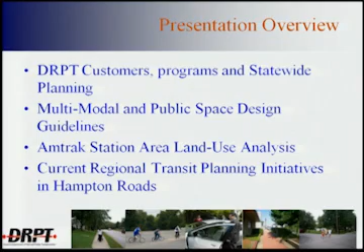We know we can't continue to expand the roads. We know we can't continue to build out, and it's just cost prohibitive. In some urban areas, there just isn't the right-of-way available for that expansion to occur. So how can we utilize the existing rights-of-way more efficiently and move people, while keeping in mind the level of service necessary for the automobile? How can we make all of these things fit and work together?

That's something we're going to explore at DRPT a little further, but I do have some good examples that I'll present tonight to show you our thinking and get some feedback from you all.

And then we'll talk a bit, and we're just about a week ahead of being able to present the full regional transit vision plan for Hampton Roads. We'll be presenting that information to the Hampton Roads Transportation Planning Organization on Wednesday, then we'll take it to the HRT board or commission on Thursday. Then we'll have two public meetings coming up: on November 30th we'll be on the Peninsula at the City Civic Center at Oyster Point Conference Room, and on December 1st we'll be on the south side at the HRT facility in Norfolk, on Monticello Avenue. At that point, we'll present all the recommendations for the Hampton Roads Regional Transit Vision Plan, the various evaluation criteria we used, the results of that study, and what we're recommending in terms of phasing for those recommendations.

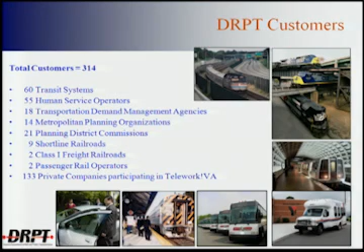It is amazing the amount of interest we've had for teleworking, with the private sector coming to us saying, how can we make this work? This is just the private companies we're working with, so you can imagine all the employees benefiting from our Telework Virginia program. It's not just the 133, but 138 public agencies we have right now, and their employees. I like to keep that in mind, because it doesn't look like a very impressive number, but it really is when you step back and think about it, because those are actual trips not being taken in the peak periods. There may be shorter trips happening during the day, but certainly those peak period commuter trips are removed when employees are teleworking.

We have numerous grant programs, both on the state side and the federal side. We have our state transit and capital operating assistance that we provide to our transit operators. We have demonstration projects that right now we're trying to focus on ITS, Intelligent Transportation Systems, doing real-time messaging to customers—when is the next bus arriving, that sort of thing. We provide technical assistance to our transit operators, helping them with their studies, and if they have an issue, we provide that technical assistance to help them through it as it arises.

We have our TDM commuter assistance programs, our senior transportation program, our telework program, and then our rail preservation, rail industrial access, and rail enhancement programs. Those are all state-funded programs.

On the federal side, we work closely with the metropolitan planning organizations on statewide rail and transit planning using federal funding. We have small urban area programs, rural transit, transportation for elderly persons and persons with disabilities, the job access reverse commute program, the New Freedom Program, the American Recovery and Reinvestment Act, and our passenger rail capital and planning funds.

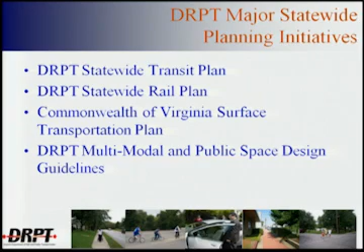I've already talked a little about the multimodal and public space design guidelines, and how important that will be to help guide localities in understanding how to utilize existing right-of-way in a way that accommodates most, if not all, uses. Not every street or corridor is going to be a multimodal corridor—we have to bear that in mind—but where it makes sense to designate one, we should provide guidance in that direction.

So now, as I mentioned, our statewide public transportation plan is really predicated on population growth. What is the trend in terms of where we're growing, and what will the needs be out in 2035?

We did this planning process in conjunction with VTrans 2035, the state's transportation plan. It's more of a policy document, mandated to be approved by the Commonwealth Transportation Board every five years. It was most recently approved last December, and we're now putting together an implementation plan for VTrans 2035.

From the transit and public transportation perspective, we needed to understand and contribute to VTrans 2035 in a way that identifies where the greatest need will be, but also where there will be big demand in terms of carpool, vanpool, and demand response services.

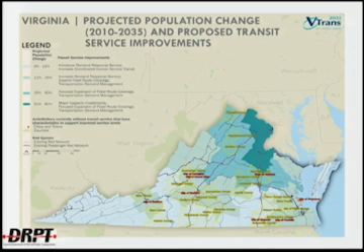We do have 4 new services coming online in some smaller areas where the business community came and said we need to provide public transportation to our employees, for job access and employment access. So we're starting some new services just for the purpose of economic development, and I think that's where the trend will continue in coming years, especially in smaller areas trying to compete and bring in businesses.

Now, the 3 main priorities here, I won't spend a lot of time on these, but in general we need to support Virginia's existing transit service through existing operating assistance. We also need to achieve and maintain Virginia's transit assets in a state of good repair.

We know that currently we have a backlog in the state of good repair for our transit systems in the Commonwealth, and we need to address it. Once we address the backlog, we need the ability to maintain the transit fleet and assets in that state of good repair.

And then, of course, expand the transit capacity statewide, as we just discussed and as this map indicates. We really need to be cognizant and focus the investment strategically in areas that are going to see significant population growth, but also be sensitive to areas with specific and unique needs. And then we need to invest in major capital projects, as we've talked about.

We currently do have a rail enhancement fund. We do not have a transit enhancement fund set up specifically for transit capital investments, major capital investments. That's something we need to be cognizant of as we move forward with a lot of the studies throughout the Commonwealth, especially the urban crescent.

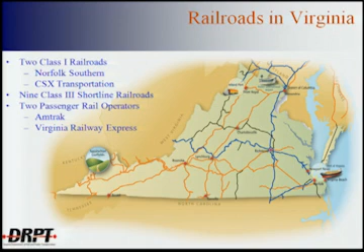We have the Amtrak regional passenger rail service that we've just launched, a little over a year ago now, to Lynchburg, and that has been wildly successful. The ridership has definitely outpaced the projections. So we're very excited about that, and we're very excited about starting a new train into Staples Mill from DC. So we have that additional service that has been implemented.

And we're trying to make the investments that are necessary in the Richmond region to bring the train, and we are going to be bringing a train down to Norfolk, which is very exciting. Tying into the light rail, the Tide, and supporting it with bus service, all of these things are going to be key to the success of that service, but also key to how we move around from city to city in the future.

So it's going to be interesting to see how that service is utilized. But I have a feeling it's going to be very well utilized, and I think there's a lot of excitement in the Hampton Roads region for passenger rail. So we're excited to be able to move that project forward.

Now, of course, why does DRPT - I've talked a little bit about our transportation planning and our interest in land use. Well, why should DRPT encourage linking these two things? And why should we be involved in it, quite frankly? Why should the state be involved in this transportation and land use planning business? Well, we're not necessarily in the business, but we're certainly a key player.

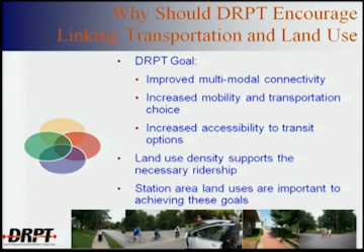So for the intercity passenger rail, we looked at and worked with 6 different communities along the Crescent rail line. We worked with Carmel Church in Caroline County. We worked with Ashland in Hanover County. We worked with them to look at station area land use plans for Parham Road, which is a new station.

It's a proposed station - not exactly proposed, but it's in their thinking in terms of where they would want to relocate their Staples Mill station, where might they want to do that. And the Parham Road site has emerged, and we did the land use planning for that site. We also did the land use planning for the Staples Mill station as well.

We also looked at Richmond Main Street Station. The City of Richmond has done a great job in terms of their land use and master planning in the Shockoe Bottom area and around Main Street Station. There's a lot of energy, and they have good supportive land use policies in their comprehensive plan, their master plan, to support the intercity passenger rail as well as bus service and increased bus service.

And then, of course, we worked with Newport News, because the downtown area is being considered as a place where we might be able to store the trains overnight. We're ultimately wanting to bring more trains into the peninsula side, and that would be a potential opportunity to overnight some trains.

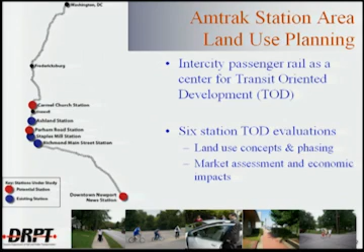We looked and worked with the City of Newport News to develop that station area. Today, what I'm going to talk about is Parham Road, and I'm going to talk about Ashland, because I think these are applicable anywhere - they would be applicable in many areas, even in the Hampton Roads area.

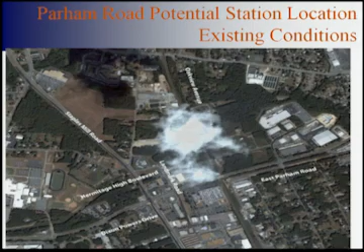But they're unique because Parham Road is a new site. It's a new station area. There isn't a lot of land use activity happening there right now. There's some industrial uses, but really there isn't the density to be able to sustain a transit-oriented development at this time. So what we did is we looked, and working with Henrico County, we developed this plan.

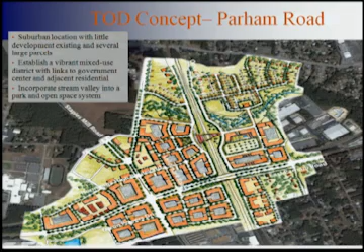This plan would establish a vibrant mixed-use district with links to its government center, which is just adjacent to residential areas, to really start to give Henrico County a sense of place. Because right now the government center is kind of out there in the county, but this would really help to link that, to establish that as kind of being the center for Henrico County. And of course it would incorporate some of the sensitivity of the stream and make that into a park and open space system to take advantage of that green space.

Now, we understand, too, very clearly that this kind of redevelopment, new development activity isn't going to occur overnight. This is going to take a lot of work. It's going to take a lot of focus and, frankly, determination on the behalf of the county government to make this happen.

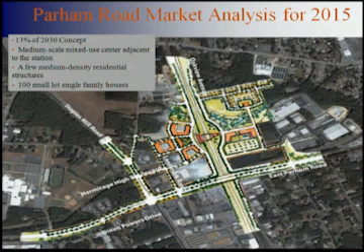So what might they be able to achieve by 2015, just to break it down into something more manageable? What we found is we could probably get about 13% of the overall development that you first saw in terms of what we were recommending. That would consist of some medium-scale mixed-use center adjacent to the station, a few medium-density residential structures, and about 100 small lot single-family houses in this particular area. So you can see we're trying to blend what's currently there with redeveloping the area into something that has the higher density, the mixes of use that we would typically see in a transit-oriented development.

For 2020, looking a few years out, 37% we think they might be able to achieve. Higher scale, average of 7 stories, so we're talking vertical height, not just sprawling out, but vertical, bringing up the stories, having that be a mixed-use center. Additional medium scale 3 to 5 story buildings in the mixed-use center. So you can see we're starting to grow upwards to help that density over the time that at this point would be a 2020 horizon.

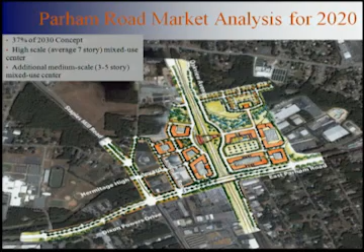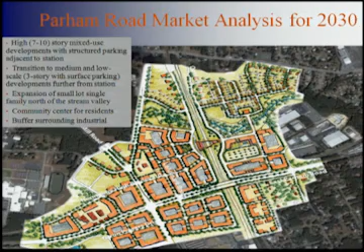And then in 2030, we look at the high mixed use, 7 to 10 story developments with structured parking adjacent to the station, transitioning down to the medium and low scale 3-story with surface parking developments further away from the station. So again, trying to step it down, blend it in to the existing uses so it isn't just this wall of urban-style development into what is more considered suburban or in some cases rural land use. And then have the community center for residents, and buffer it with some of the industrial that's currently there, which Henrico County really obviously wants to try to maintain in this area.

And then this is just the overall bird's eye view of the Parham Road TOD, and this is the station area plan. Should zoom in there. It's kind of neat, but when I see this graphic, I think that's great. And then I think, here's where our guidelines come in - here's where our multimodal guidelines come in.

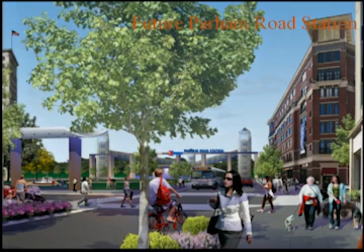If they could apply those, they could say, okay, here's how in this kind of environment we can have bikes, buses, pedestrian movement, activities happening, economic development, outdoor cafes - fun things that make even the younger generations, and even the aging population who doesn't want to drive across town to get their coffee, happy. So this is where I see the guidelines we're going to talk about, how they could be applied, and ultimately what they could result in.

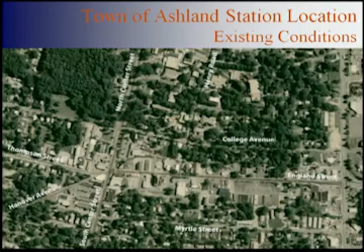Now, very quickly, because we've already gone through the thought process of having these redevelopment activities, these redevelopment projects, transit-oriented development, and how that could be phased over time.

So just very quickly for Ashland - they're a historic town, and they built up around this station, and they're very proud of that station. They have celebrations for it in the summer. That little town is very walkable, it's bikeable, it has a great community feel. They have their little markets, and it's something that is really to be treasured, in my opinion.

What we have done is build on that historic character of this town. But we've also said, let's try to increase the connectivity with Randolph-Macon College. Let's work with them to help the movement between the college and the downtown area. We heard that when we met with the college, and we heard that when we met with the town folks. Let's try to have that connectivity work a little better.

So they did that, and their 2030 design concept was to have that development adjacent to the station, with redevelopment occurring, some mixed-scale, mixed-use center, and a few medium-density residential structures. They have height requirements on their buildings - they don't want to go giant high because they're clearly a historic town, so that wouldn't fit the character of that space.

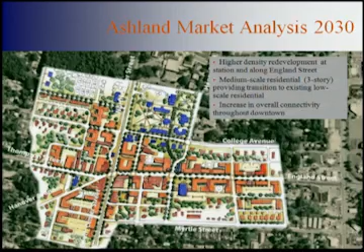This is just the bird's eye view of the town of Ashland's TOD. This is what it looks like today. It's a lovely little town, but if they were to implement some of the design guidelines, some of the land use recommendations, this is what it could look like.

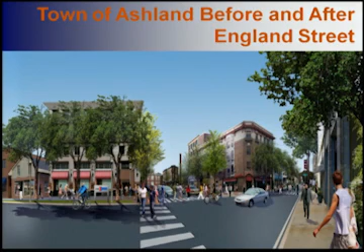Now, moving into the multimodal and public space design guidelines. This is something, again, that I think is very important, and I think it'll be a very interesting planning process to move towards.

We currently have some transit service design guidelines that help provide information on what kinds of transit investments are appropriate for different land uses, so that we're not trying to put light rail in areas where it's a rural area. We're trying to be sensitive and provide that guidance to localities.

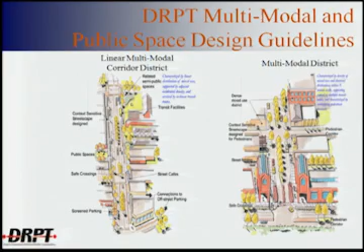But this is going to take it to a whole other level. It's going to really help us understand how we can accommodate all the various modes. We need to provide guidance to facilitate the organization of planning for bicycle plans, pedestrian plans, bus and rapid transit plans, even intercity passenger rail plans, and to support implementation and enhance the function and character of the infrastructure.

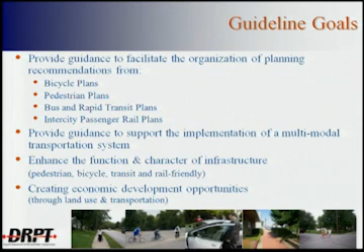Really, that's what we're trying to do here. We're just trying to make it more appealing and safer in many cases for the pedestrian and the bicyclist, for those trying to access transit, and also for the automobile drivers, because sometimes they don't see pedestrians or might not see a bicycle coming off the crossroad. So it is safety for all modes.

It facilitates the design - the facilities will be designed for joint uses and connections between two or more modes of transportation. That's really what we mean by multimodal transportation. It includes bicycling, walking, transit, both local bus and rapid transit, rail, passenger and freight. It also means automobiles, and includes aviation and ports.

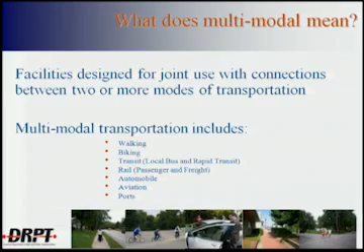We work at the state level with all the various modal agencies now. We talk on a biweekly basis, and we're really coming together to understand how we can support each other in our transportation needs. What does aviation need from us? How do we support the ports? We do a lot of work with the ports in the freight world. But we also need to learn how we get people to and from the ports that are working there, just from the transit perspective.

But the guidelines are really going to focus on the first four. It's going to look at the pedestrian, the bicyclist, transit, and rail, more from the passenger rail perspective.

And what makes a street multimodal? I'm sure you're all familiar with this, but just physical comfort and safety, having that balance in the transportation system, having dedicated or shared signed facilities, a buffer between conflicting uses, having adjacent land uses that create visual interest and activity, and having convenient amenities that make it a place where people want to be. That's really about us - about what we want and what our needs are, and how we can get that from a guidelines perspective.

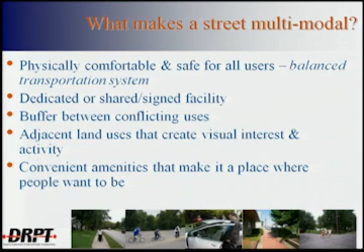So how do we become multimodal? Well, we start with our vision and the existing recommendations for the transportation systems. We're doing that with high-speed rail. We've done that with intercity passenger rail. We're doing that with the regional transit vision plan. So you have a great vision for this region.

And Virginia Beach is very well positioned, being the lovely city that it is and having all the amenity of the ocean front. You all are in a wonderful position, in my view, to really go a long way in terms of having all the various transportation modes working together. Because I'm sure you have a lot of people wanting to bike to the ocean front, wanting to walk there safely with their kids, wanting to also get there if they're coming in for vacation and traveling with their family in their cars. So you have a lot of demands on you in this city.

And how can we have the street geometrics and the spatial organization of the existing right-of-way, and then pay attention to the details and the character, and all of this. When we do all of these different things, this will lead to the opportunity for the efficient realization of the multimodal corridors throughout the design, the development, redevelopment, and continual investment.

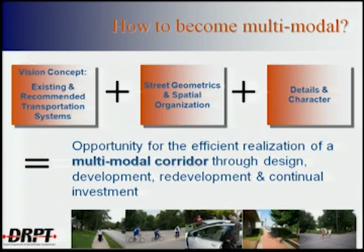Like we saw with the station area land use planning, it's not going to happen overnight. It's going to take a long time to get there. So we have to be - it's a marathon, it isn't a sprint, as we like to say. And then the typologies.

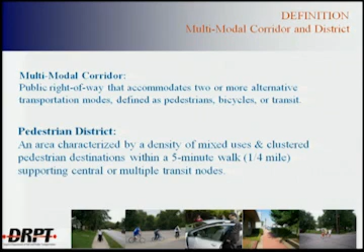Of course, we have the corridors, the linear corridors, and then we have the districts, the station area, five-minute, quarter-mile walk area around a particular node, either a transit node or a rapid transit or bus rapid transit station. Having the corridors organized into typology is very important because these consider both the transportation function and the adjacent land use.

So what we're trying to do is link these multimodal guidelines with the functional classification of the roadway system, so that we're being very sensitive of the context in which we're trying to implement these recommendations—so we don't put a quiet street on some commuter road. I think that's necessary because those are the investments we've made, and we need to be respectful of that system and how well it's functioning.

So if we can have them organized into vehicular-oriented, whether it's a parkway or a boulevard, or a commuter corridor, a connector—just making those connections into the commuter corridor—or pedestrian-oriented, having the gateway. Gateways are really big right now, in terms of 'you've arrived to Virginia Beach.' We need to have some sensitivity to that as well.

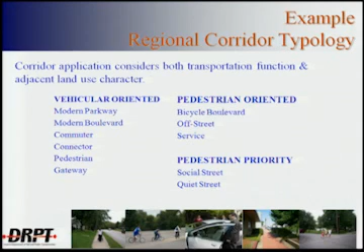And then, of course, you have your pedestrian-oriented areas. You have bicycle boulevards—you had Dan Burden here, I'm sure he talked some about the bicycle boulevard, and how walkability is necessary in these pedestrian-oriented areas. And then having your social street and your quiet street, where the pedestrian is the priority.

Now here's an example. This is an illustration of a multimodal corridor—this is just the urban pedestrian corridor. Notice how we've been able to establish the parking, on-street parking. We do have some bus pull-offs. We have bicycle lanes. There's something in here, a bicycling box, that I'll be very interested to hear bicycling enthusiasts' thoughts on.

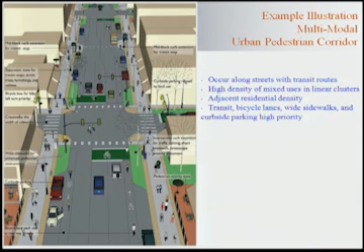I'm curious as to what you think about that, because this is something that I think maybe for the real avid, experienced cyclist, they might not be so keen on it, but for the more novice person who wants to start commuting, this provides them the ability, on a red light condition, to get out in front of the stopped vehicles. They can go straight, make their left turn, or make the right turn safely through the intersection—it gives them that safety space. So I'll be curious to get some feedback from you all on that one.

But you can see the safe crossings, you can see where the pedestrians are on their pedestrian way, on the sidewalks and the activity centers, and how all of these different things can work together—that quasi-public space where you're entering into those buildings, entering into those outdoor cafes. And what does that mean for ADA accessibility? A lot of that we don't think about, but sometimes those cafes do start to intrude on people being able to get through if they have a special need. So this is something the guidelines can help people think about.

So we can add the pedestrian crossings, we can have the bus pull-offs, we can have some design amenities from landscaping just to help buffer the pedestrian. These are all things that, yes, take time, yes, take planning, and in some cases there is the need for reconstruction in some areas. But at the end of the day, you're making it a safer environment, making the choice to walk, bike, or access transit more attractive. And at the end of the day, that's what it's about.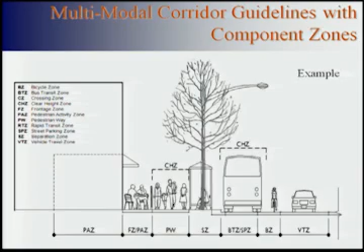And then you have, of course, your frontage zone or pedestrian activity zone. As I said, you have your quasi-public space, and you see how that pedestrian activity zone actually does enter into the private space, because there is that connection that happens, and you need to think about that a little bit as we're developing the guidelines.

But you have good crossing, good demarcation of the markings there on the crossing zone. You have appropriate ADA accessibility in the pedestrian way for people trying to access the crossing zone. So you have the signals, the crosswalks - hopefully not just push crosswalks, but something actually integrated into the timing of the signal, so it's built in and people can know when to expect that advancement of the crosswalk signal.

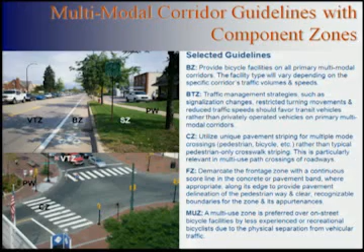Then you have your pedestrian way - it's a little different, your frontage zone is a little different, your quasi-activity zone is going to be a little different. So you just need to be aware, it's all in the setting, it's all in the context. But these guidelines are just for that.

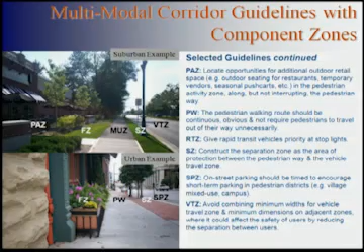They're just to help folks, to help us organize all of these recommendations and really start to think about how we work with the local developer, how we work with our planning and utility departments, who are all trying to get to the same thing of moving people around, whether on a bike, in a vehicle, or on the bus. So these are ways for us to provide guidance to the localities, and hopefully it will be received as such as we move forward in developing our guidelines.

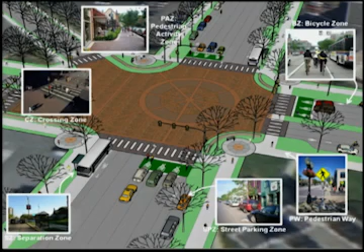But here's just some examples - again, you can see the bicycle box, the bicycle lane, and a nice crossing here.

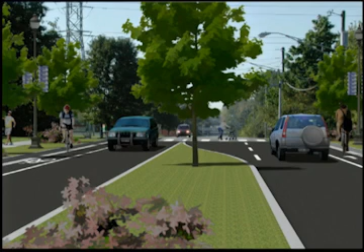Now here, this is actually in Beech Grove, Indiana. We did the multimodal and public space design guidelines, and we actually applied those guidelines in Beech Grove, and they designated this as a pedestrian corridor. I think it was a commuter corridor, and they did some work with one of their architects, and this is what they came up with.

So you can see there, if you look in the previous photo, a lot of the amenities are there. You can see the person walking, running, jogging, and there's a park close by. They do have some crossings, and you can see they're accommodating vehicle traffic. They do have the turn lanes, but just by making this investment in having the green landscaping, the bike lane, and the safe, obvious crossings that are now safe to get from one side of a pretty large, busy road, you see how this can start to accommodate these various forms of transportation within that right-of-way. So really they're building on what they have, making something more attractive for their citizens in that little community, the city of Beech Grove.

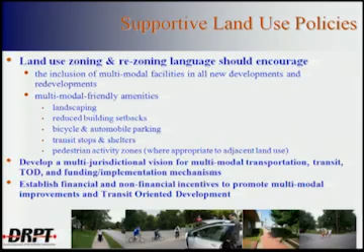Develop the multi-jurisdictional vision for a multimodal transportation system. And I think that's where Hampton Roads really is right now. I think you're all really coming together with what your vision is going to be for this region in the coming decades—with high-speed rail, intercity passenger rail, light rail, regional vision, bicycle, pedestrian, and the regional greenways that are forming. There's a lot of really great energy here to start making some of this happen. It's coming together, and really thinking about it and having the discussion. It's not always an easy discussion, but usually those discussions are worthwhile, and most of the time you come out with a better result than what you went in with. So I think that's something we can continue to think about in this region.

Again, establish some of the financial and non-financial incentives to promote multimodal improvements and transit-oriented developments, whether it's fixed guideway or just local bus service—because sometimes it's the non-financial piece, just making it easy for developers to come in and do this kind of redevelopment. It doesn't necessarily mean it has to cost the taxpayer a lot of money from an incentive perspective, but just make it easier for them. I'm not a developer, but from a planning perspective, having worked in a city where we've done a lot of that, that's what I hear from my colleagues who work on the zoning and ordinance side—sometimes it's just making it easy for the developer to come in, have the conversation, and sit down with something to go by instead of guessing at it.

That goes a long way. So with that, I will thank you all. I appreciate so much your sitting through this and hearing my presentation, and I really appreciate having the opportunity to present these thoughts to you all.